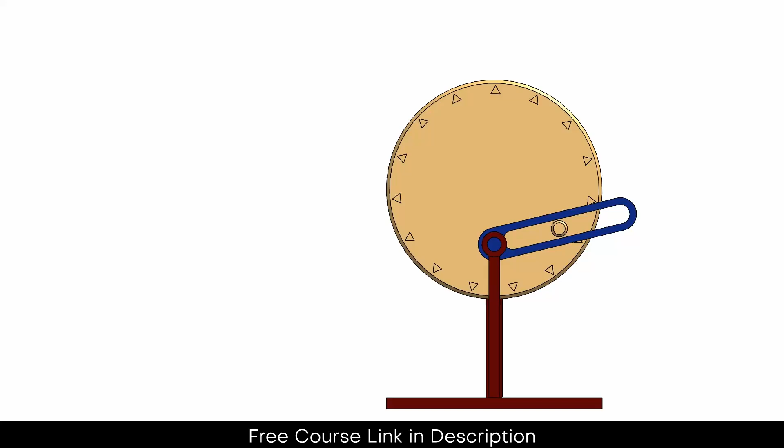Namaste guys, in this video we are going to make this mechanism.

So let's start. First thing I need to do is make some circles and a shaft. Let's see how to approach it. Click on new part, select the front plane, press Ctrl plus 8.

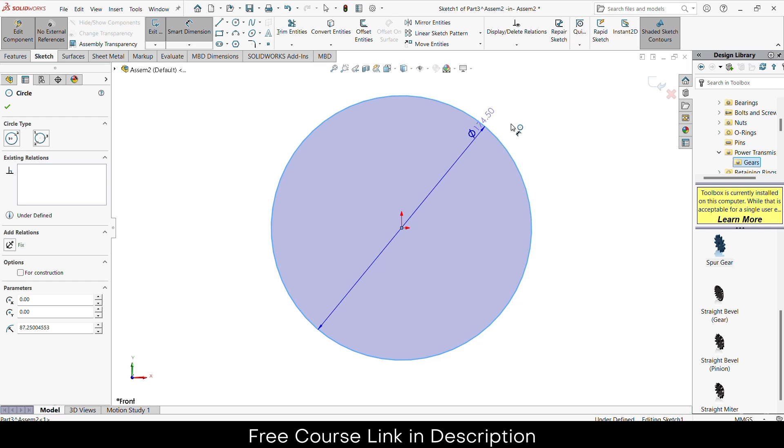Make sure no external references is checked on, else you will face a lot of issues. Now draw a circle here as I'm showing, give it a diameter as per your requirements. In my case, 200 mm is fine for me. Press escape key, select this circle and drag it. By pressing Ctrl, select these 2 points, make it coincide.

Go to the features, extrude. Increase the thickness as per your requirement. In my case, 20 mm is fine. Click OK.

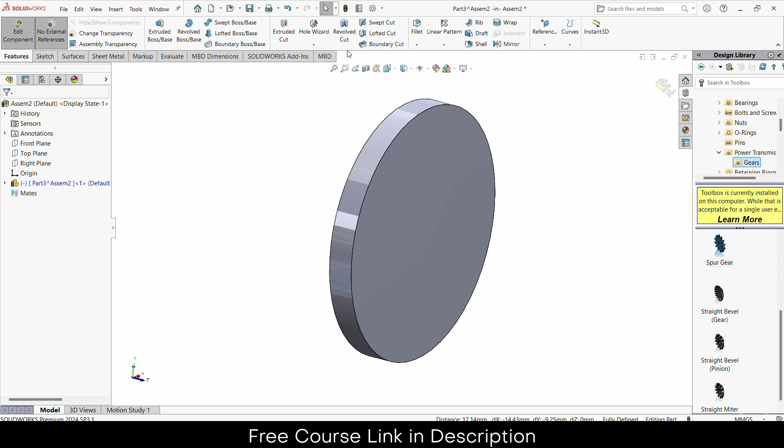Now I will click here, click on chamfer, select this edge and this edge. Notice the thickness is quite high, your fillet chamfer is quite high value, so I will make it a small value. Let's say 3. Click OK.

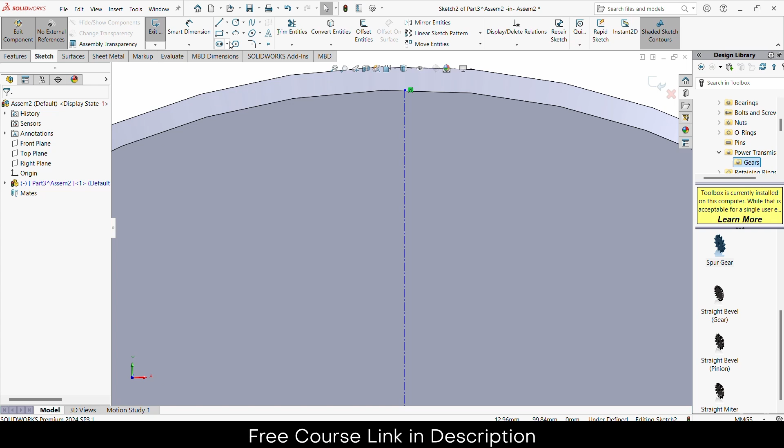Now that looks better. Select this face, click on sketch. Now I will draw a center line here. Escape, zoom in, click on here, make it number of 3.

Draw a shape like this, give it a diameter as per your requirement. In my case 3 is fine, and I will zoom in, give it a distance value of... let's make it 5, a bit bigger.

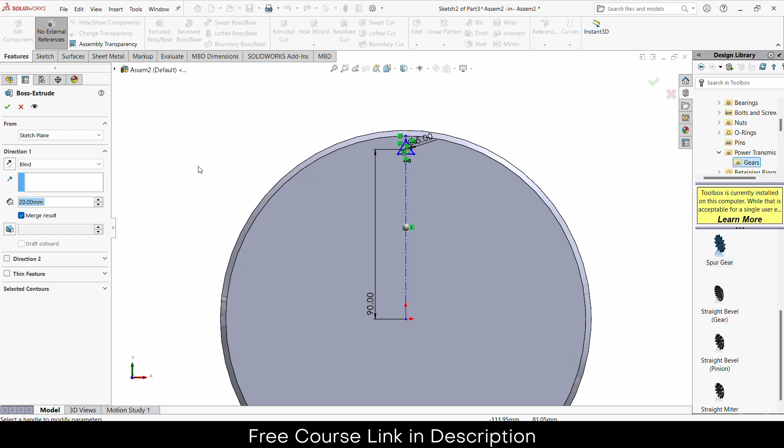Sorry for the unwanted noise, I can't do anything about that. There's a festival going on here.

Now what I will do is click on circular pattern. I will select a circular face. What I want to pattern is this feature, so I will select this feature and increase the number of instances as per your requirements.

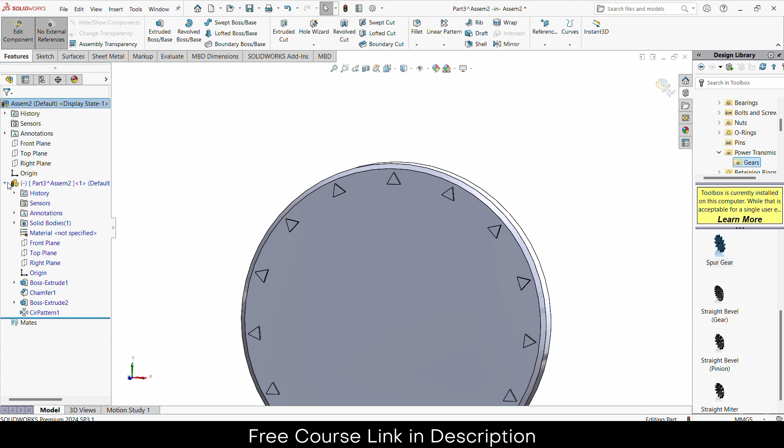Click OK. One more thing I'm going to do is select this, go to edit feature. Instead of blind, I will choose the mid plane. Notice now it is extruded on both sides.

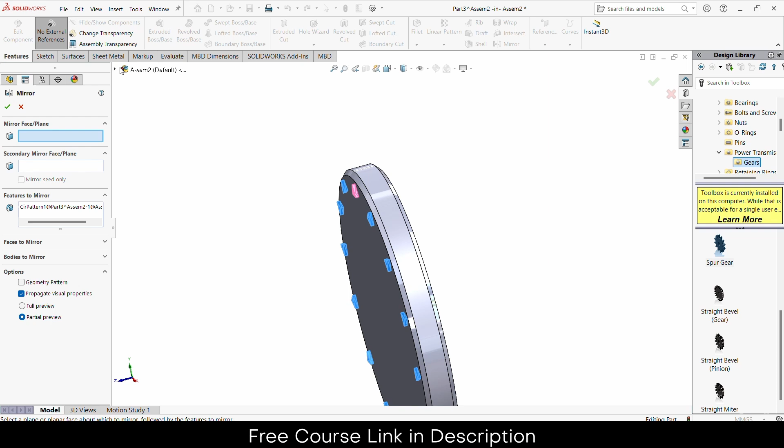The reason I have done this is so that I can use this circular pattern easily without using another plane. For example, when I want to do mirror, it asks me for a plane. Now because I choose the mid plane, I don't need to create an extra plane, so it's a time saving thing. Click OK. Now it's on both sides.

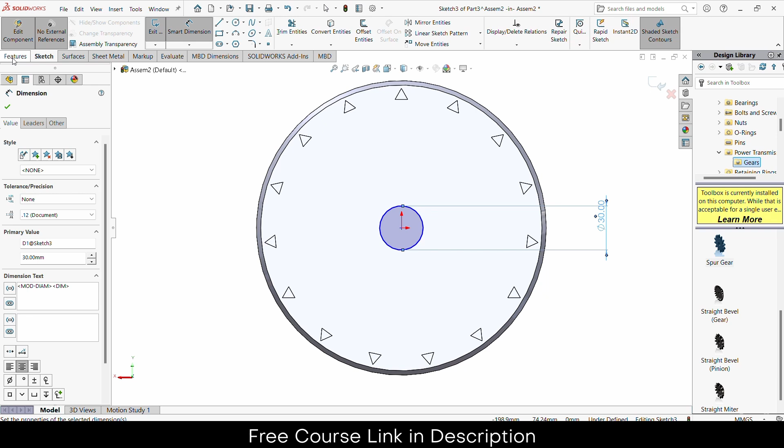That's great. Select this face, click on sketch, draw a circle here, give it a diameter as per your requirements. In my case 30 is fine. Go to the features, extrude. Let's say 30. Click OK.

Now this seems good. Exit the assembly component mode. Select this face, press Ctrl plus 8.

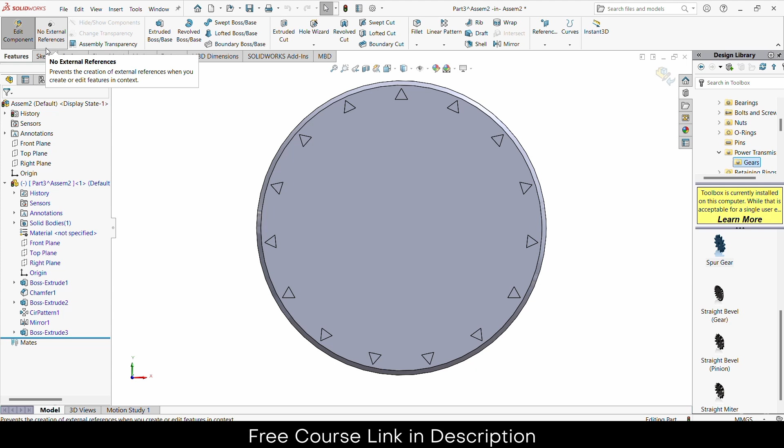Now I have to add one more thing, sorry I forgot it. So I will select this, click on edit components, go to the sketch, select this face, click on sketch.

I will draw a center line here like this. Escape, draw a circle here, give it a diameter as per your requirements. In my case it is 15, and I will give it a distance from 70 from the center. Go to the features, extrude.

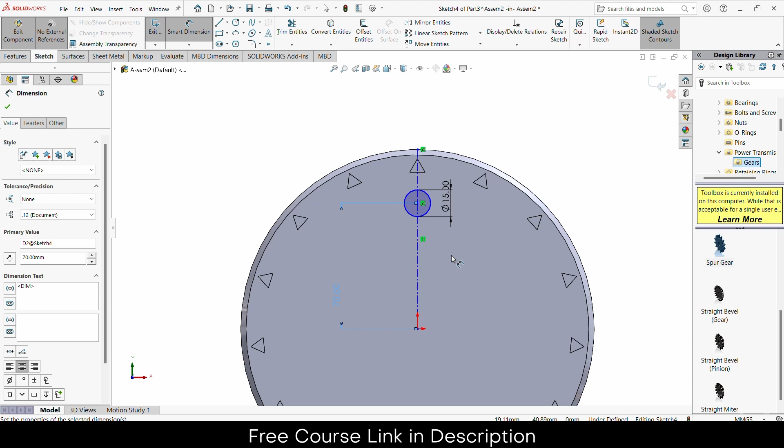20 mm is fine. Click OK, and I will choose chamfer. Select this edge, 2 mm. Click OK.

So this is how it looks like. Now exit the assembly component mode.

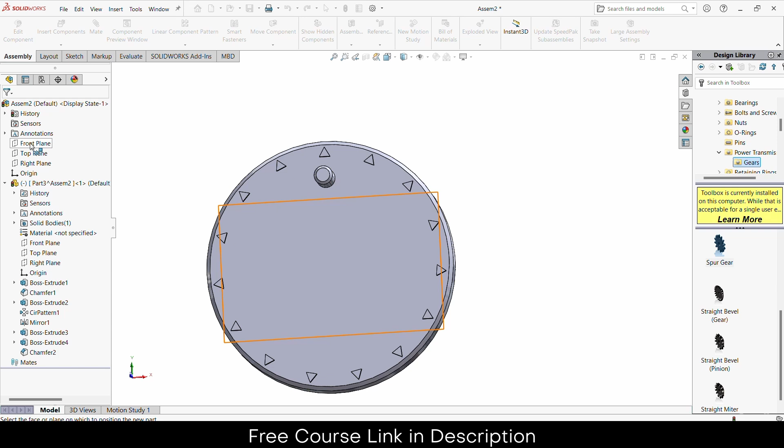Now what I will do is click here, new part, and select the front plane. Press Ctrl plus 8 for normal to the view. Now I will draw some circles here.

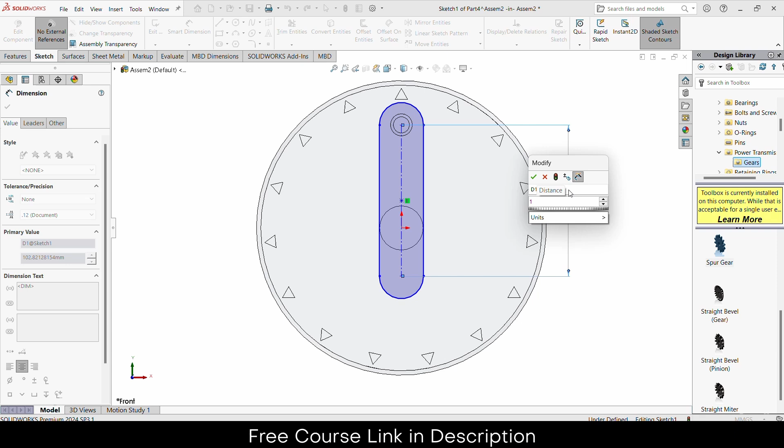And this, from here to here, is 40, and this one is 15.

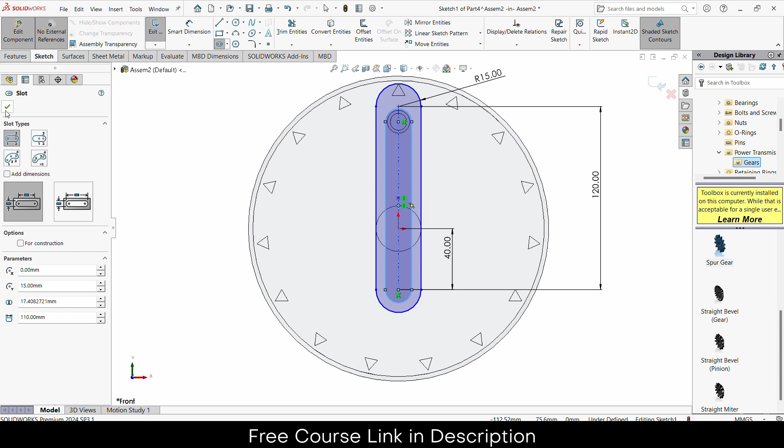Click on here and make sure while making this no external references is checked on, else you will face a lot of issues. Now I will draw here to here, here. Okay, click OK. Looks a little bit odd here.

So what I will do, instead of 40, I increase this value to, let's say, 60. Oh, 60 is quite big. 50 is fine.

Press Ctrl Z, I have a better idea. Escape key, select this and this one. Okay, select this and delete.

Select this point and this one, make it 70 mm. Draw a line like this. Now it looks much better.

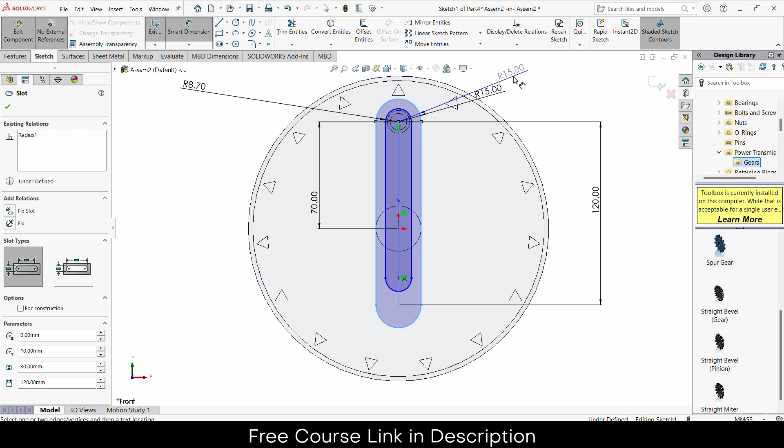Sorry for the little mistakes that I'm showing, but I personally think mistakes are the best friends. You will learn a lot of things if you see me doing mistakes instead of thinking that I am a fully professional who knows everything. That's not reality.

Click OK. Select this face, click on sketch.

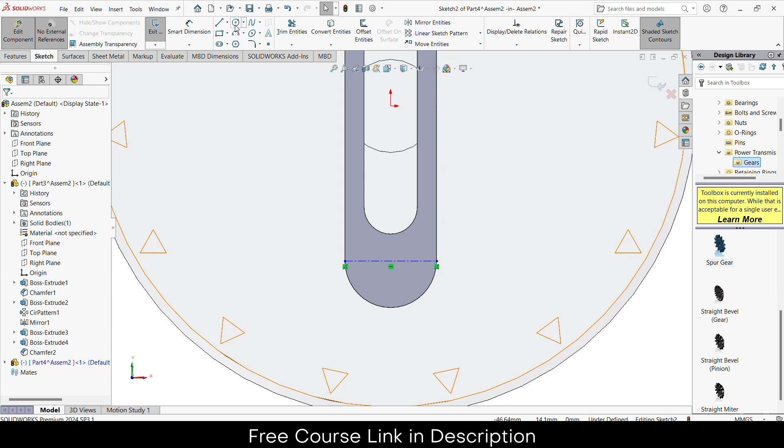Features, extrude it, click OK.

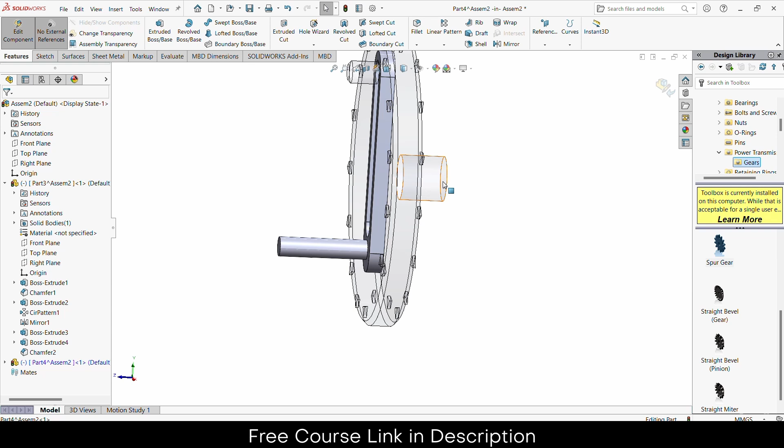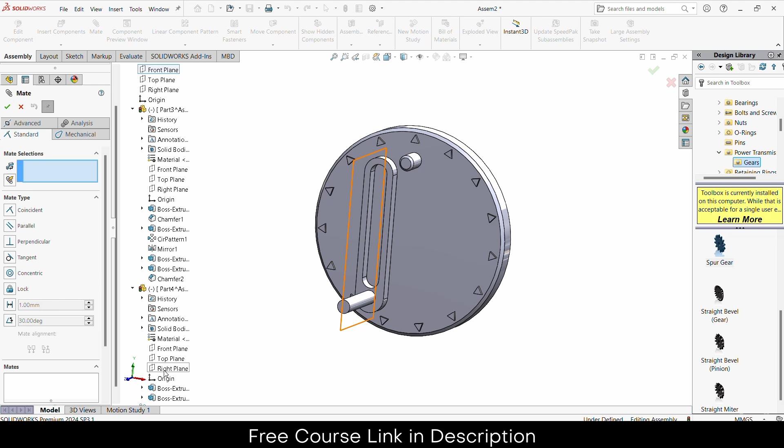I will select this plane and the right plane of the assembly. Click OK. Just to know, the mate I just did is temporary. I am going to delete it afterwards. Its sole purpose right now is to get the correct location.

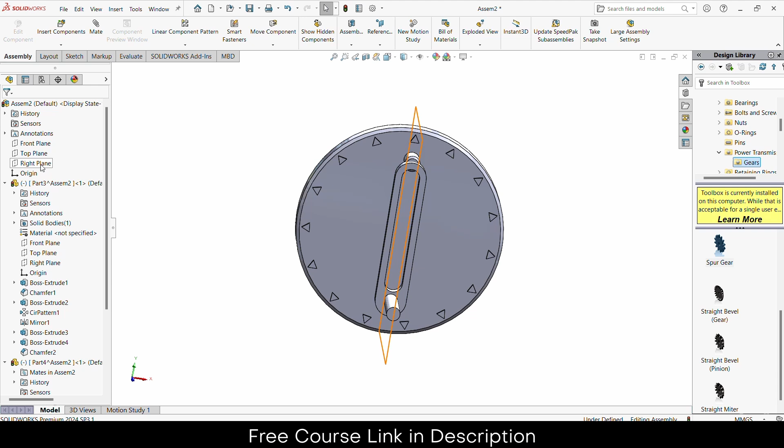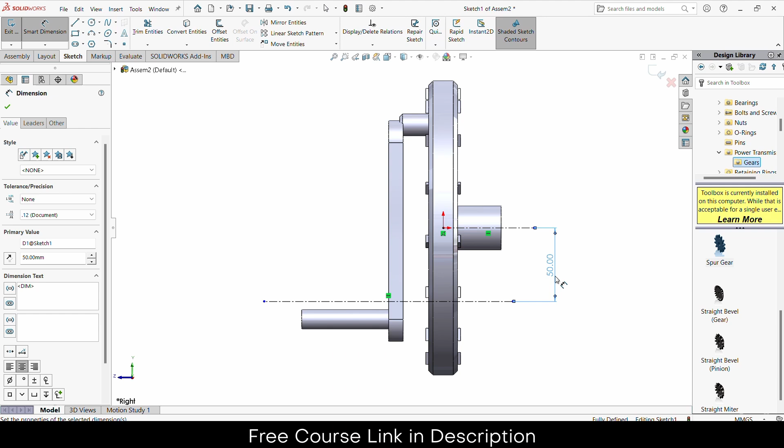Now one more thing I will do is select the right plane, click on sketch. Now I will draw some sketches, this, and I will draw another line like this. Make sure this line is horizontal. The distance between this line and this line is 120 minus 70. Click OK, exit the sketch mode.

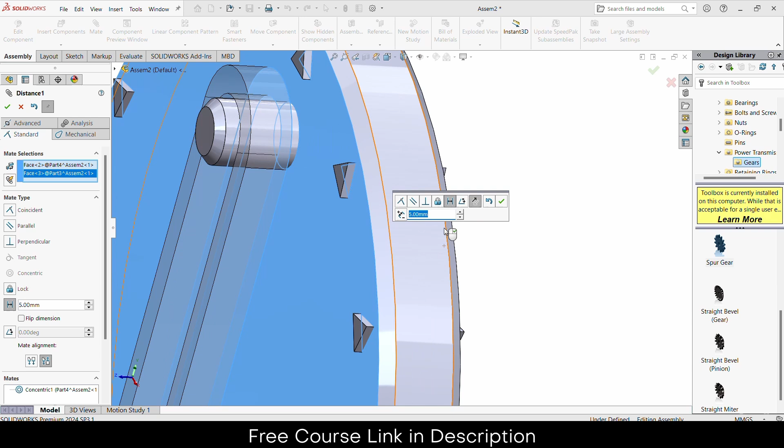Select this, make sure it's concentric, click OK. Select this face and this face, click here, add the value of distance. In my case, 5 mm is fine. Click OK. Select this face and this line, make sure it is concentric as well. Click OK. Now we have made up to this point. Exit the sketch mode.

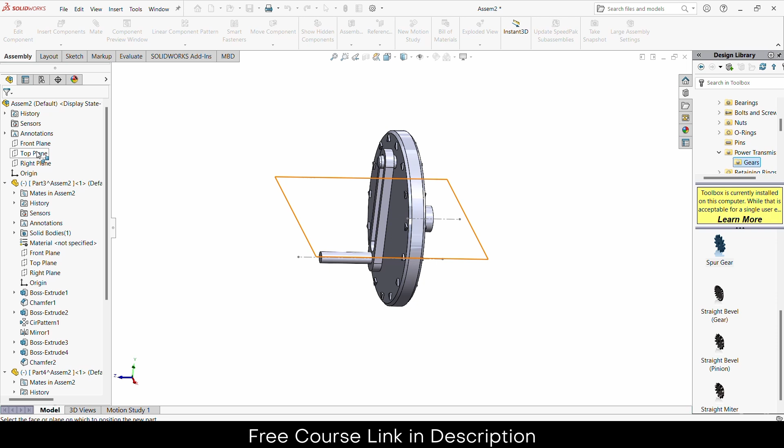Now let's see how we should approach here. First, I will click on new part and select the top plane. Press Ctrl plus 8 for normal view. Click here, click on center rectangle. From this point, I will draw a center rectangle like this. Make sure no external reference is checked on, else you will face a lot of issues.

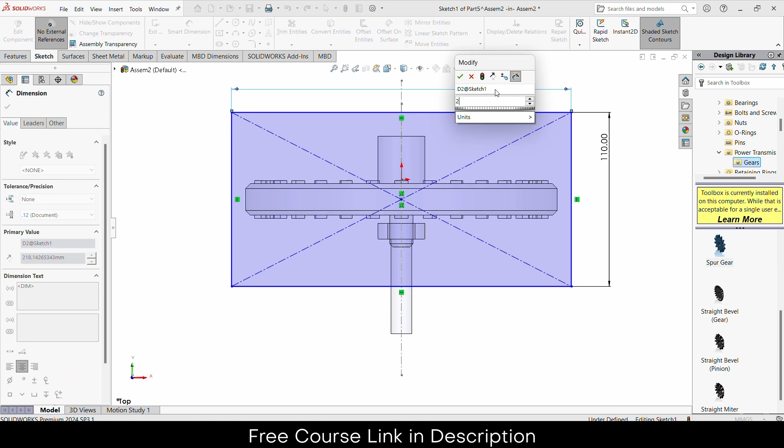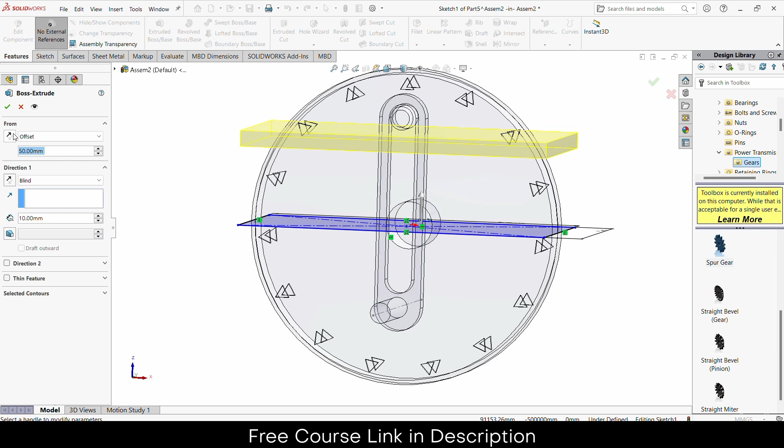So 110, and this one will be 200. Select this point and this point, make it 0. Go to the features, extrude, enter the value of 10 mm. Now it's not the correct place. Go here, offset, increase the value. It's going in the wrong direction, so change the direction. I think this much is fine.

Now let's go more downward. Anyone guess why I'm moving it more downwards? Think about it for a second why I'm doing it.

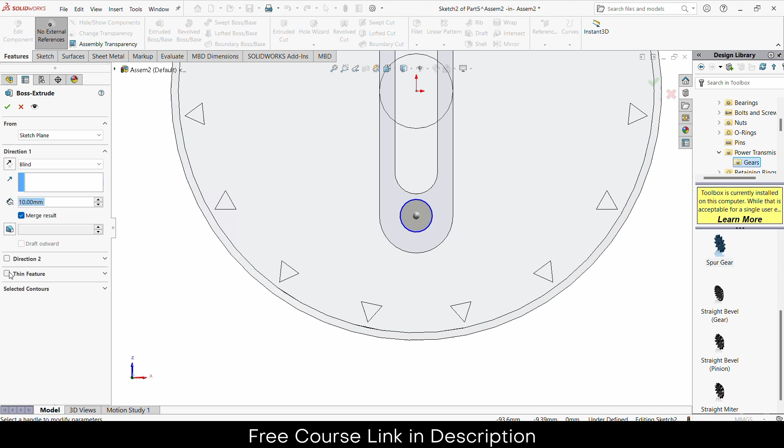Now I will select this face, click on sketch. Now I will draw a sketch here. Go to the features, extrude, click on thin feature, decrease the thickness to 5 mm, and click on reverse direction. Go to the offset and I think reverse direction, this is fine, click OK.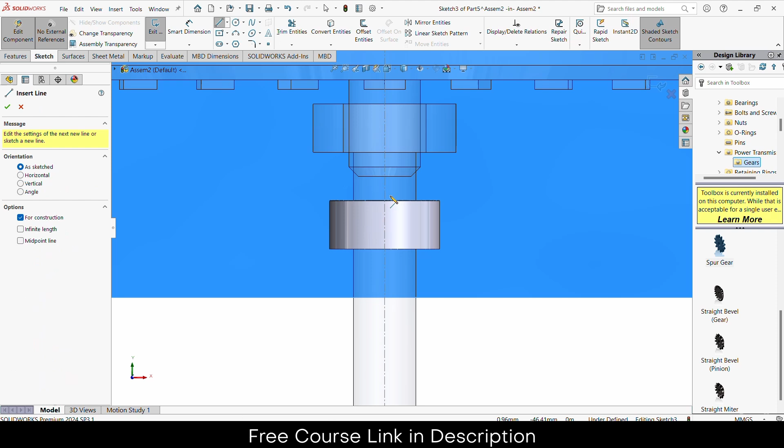Select this face, click on sketch. I will draw a center line here from here to here, click here and draw like this. Give it a thickness as per your requirement, 5 mm is fine in my case.

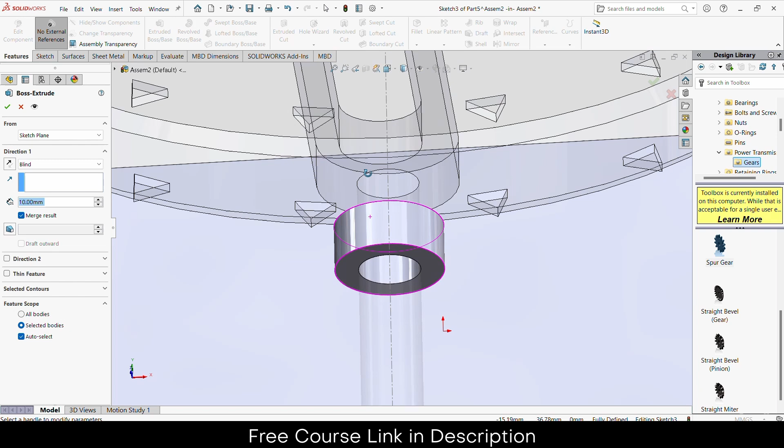Let's add one more thing. Let's add this one, let's say 10 mm. Click OK. Go to the features, extrude, extrude up to surface. Select this face, click OK.

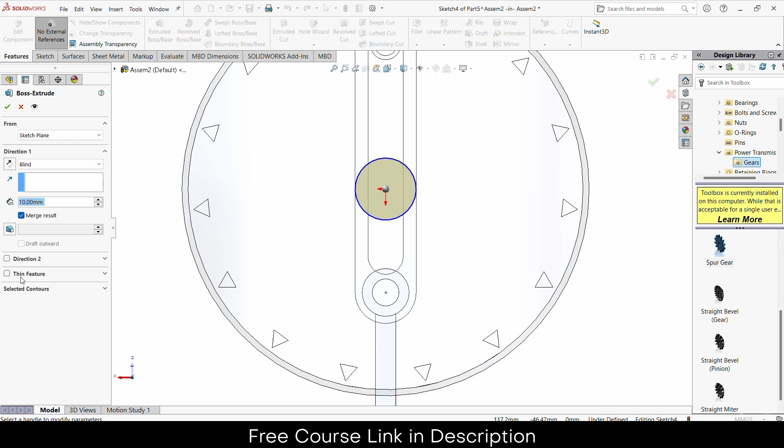So we have made one, but one more is left. Select this face, click on sketch. Go here, select the face. Sketch, draw the sketch. Go to the extrude, and I will choose blind thin feature. 5 mm is fine. Reverse direction, offset 5 mm or 10 mm, but in reverse direction.

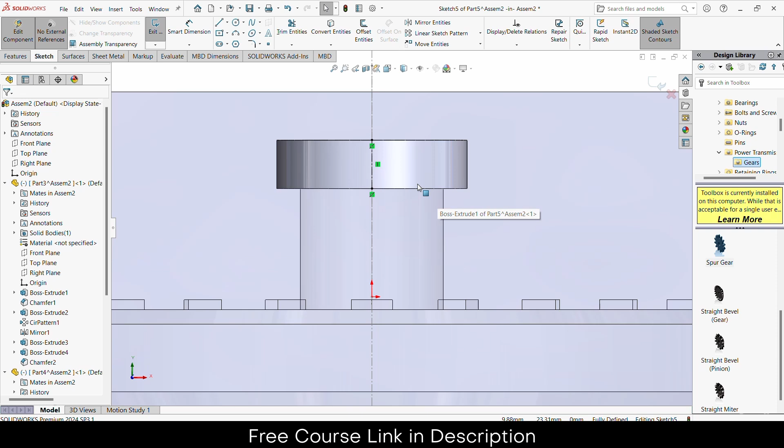Click OK. Select this face, click on sketch, zoom in, draw a center line like this, escape. Notice, okay, it's inside of it, so no issues. Now what I will do is draw this, 5. Let's make it 15 here.

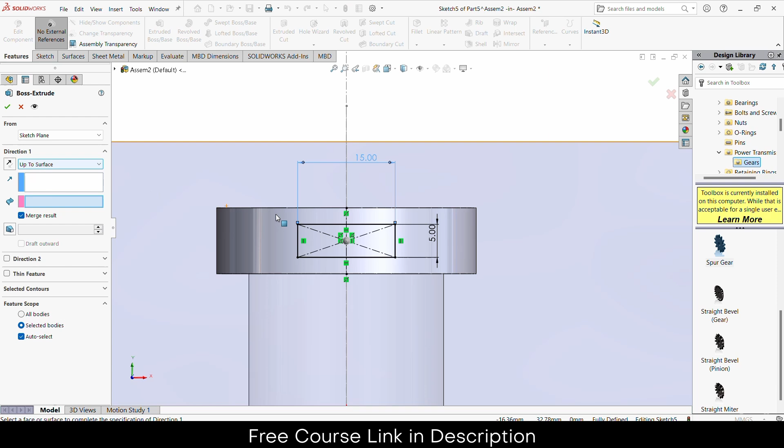Extrude up to surface like this face, click on sketch. Exit the assembly component mode.

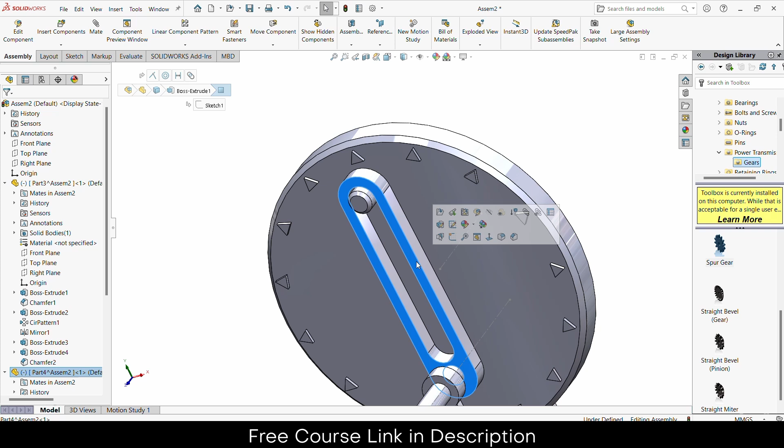Now go to the mates, mechanical, slot, select this slot and select this face. Click OK and close this. Select this face, press Ctrl plus 8. If I try to rotate it, notice I can't rotate. Why? Remember I used a temporary mate, this one, so I will right click on it and delete it.

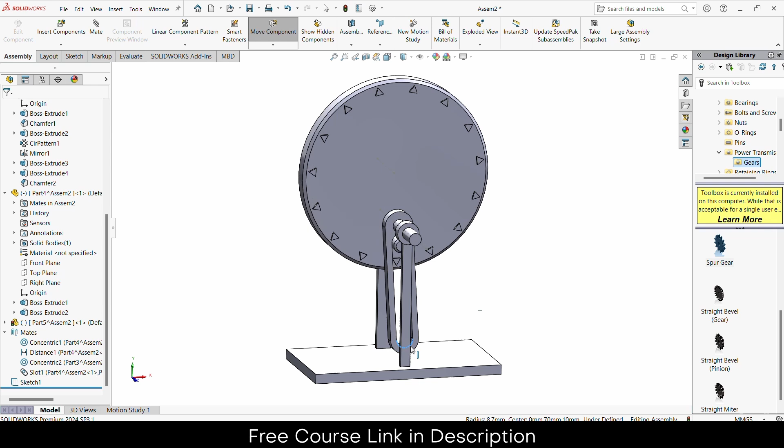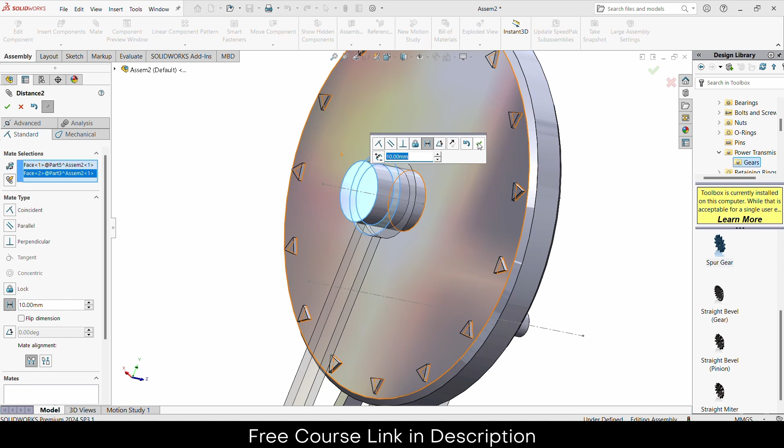Yes, now it's moving. For those wondering why this much height, notice at the bottom it doesn't collide with it, so that's the reason I gave it that much height. One more thing is that it's moving forward and backward. I don't like it, so I will go to the mates, click on standard distance, select this face and this face, enter the value 10 here, click OK. And if I select this face, press Ctrl plus 8, you can see how it's working.

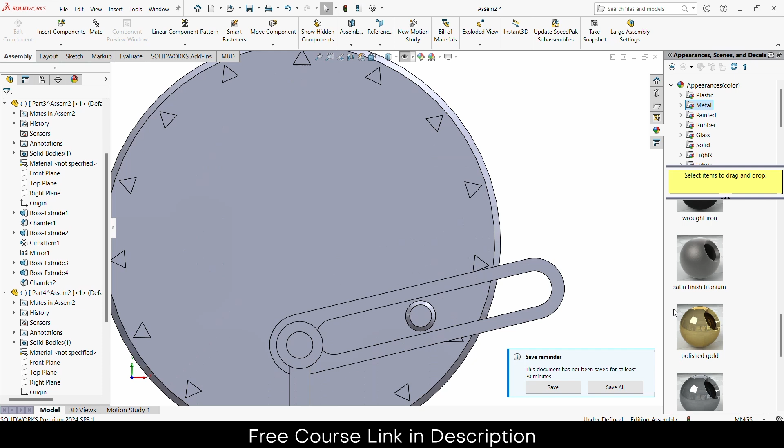Now you can add some coloring to it. So I will go here and let's add some colors. Appearances, metal, and let's add this polished gold to this, and I will go to the painted car. Let's add this one here, and to this one.

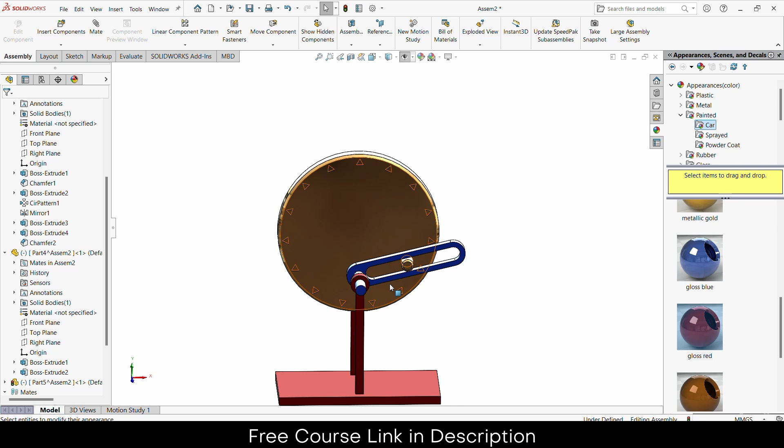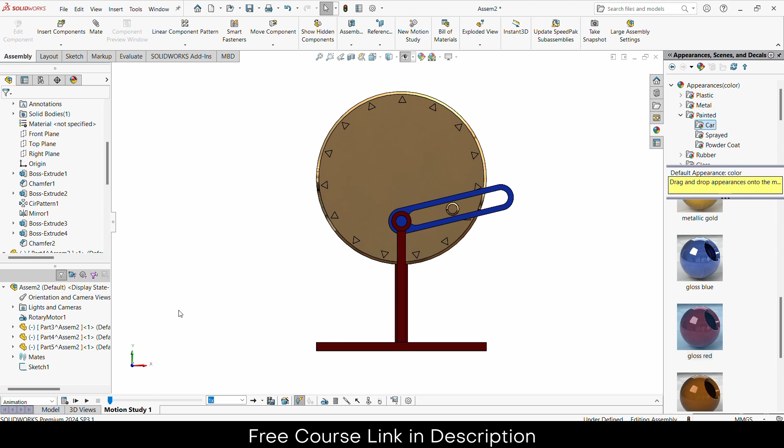Now let's try to do the animations. Go here, motor, select this face, reverse the direction, go to the distance 720. Start at 0 seconds, total length of the animation is 5 seconds. Click OK, make it small. Click here, increase the FPS for better quality. 30 FPS is fine, click on calculate.

So in that way you can see how our animation looks like. You can make more and better animations as per your requirement.